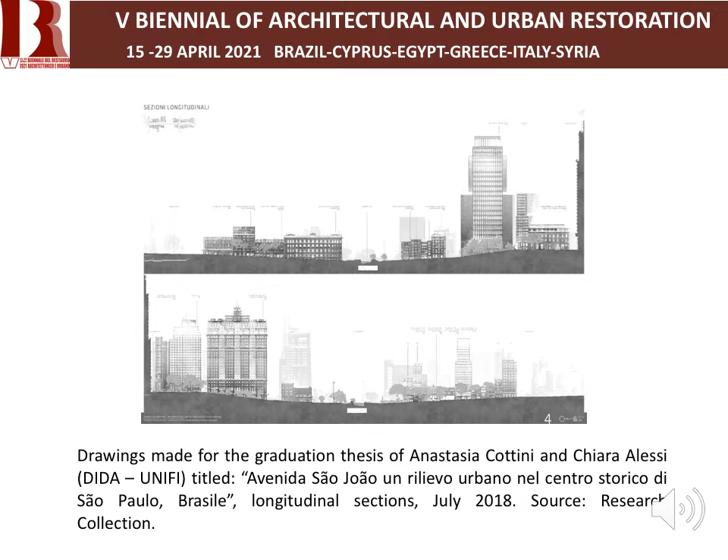For the representation of the facades, photogrammetry was performed using the PhotoScan software. For the inaccessible parts of the facades, a DJI Spark drone was used. Finally, the model obtained from the point cloud produced by 3D laser scanning was overlapped on all these data.

Once the survey process was completed, the students, divided into groups, researched the historical documentation related to the selected buildings in the archive. The results of the empirical examination and the historical research were brought together in a text divided into the following topics: urban topographic context and plans,

authorship, history and analysis of projects, owners, builders, tectonic issues, materials and construction technique of the various parts of the building, and aesthetic issues.

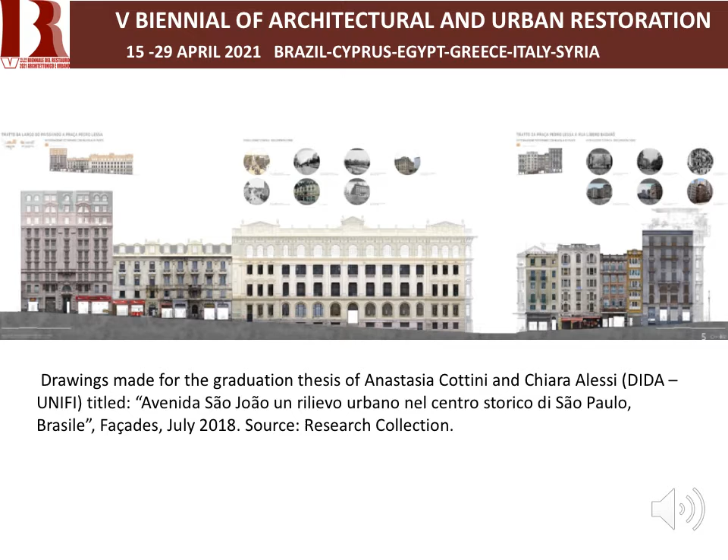In addition to the buildings in the downtown, digital surveys of historical buildings from the colonial period on the coast of the state of São Paulo were executed. That is, the ruins of the settlement known as the Sítio do Abarebebê in the municipality of Peruíbe, and the architectural ensemble of the church and convent of Nossa Senhora da Conceição and Igreja Matriz de Sant'Anna in Itanhaém, studied by Dr. Regina Vieira Santos and object of the research project Jovem Pesquisador Barroco Cifrado, funded by FAPESP, coordinated by Professor Renata Martins at FAU-USP.

The results obtained with the application of this architectural survey and historical methodologies, emphasizing the educational potential of using technology in communicating the significance of buildings as documents of urban history to the public, led in 2020 to the ratification of a cooperation agreement between the Faculdade de Arquitetura e Urbanismo and the Museu da Cidade de São Paulo, an organ of the Secretaria da Cultura da Municipalidade de São Paulo.

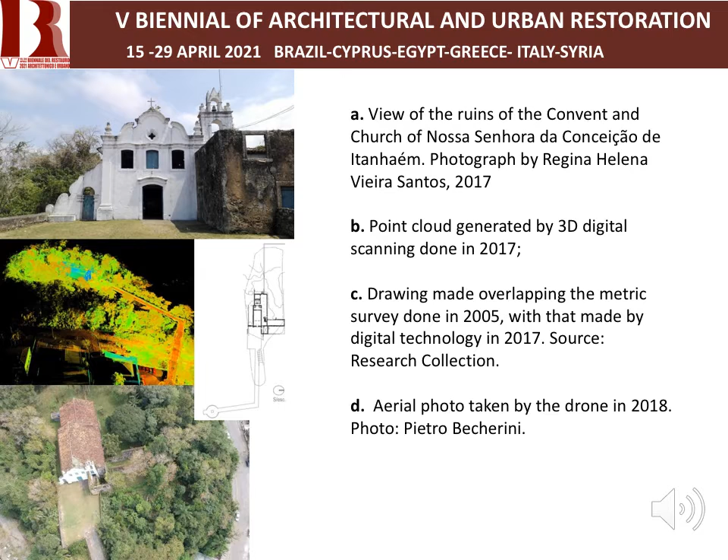As we will see, the buildings chosen as case studies were selected above all for their importance in the history of the urban development of the city, of the techniques, and of the construction industry. Below, some selected case studies will be presented.

The Edifício Baraúna, signed by the engineer Ricardo Severo, was built in 1923. It stands out for the novelty of the constructive solutions in relation to the average buildings carried out in São Paulo at the time, and the adoption of a neo-colonial decorative repertoire in the facades.

The structure is in reinforced concrete and brick masonry, and is covered with mortar, imitating carved stone decoration. The ground floor is all for commercial use, as well as the basement facing the Vale do Anhangabaú. It has an independent access through Avenida São João. Intended to be a warehouse, it has been the place of the historic Restaurante Guanabara during many years.

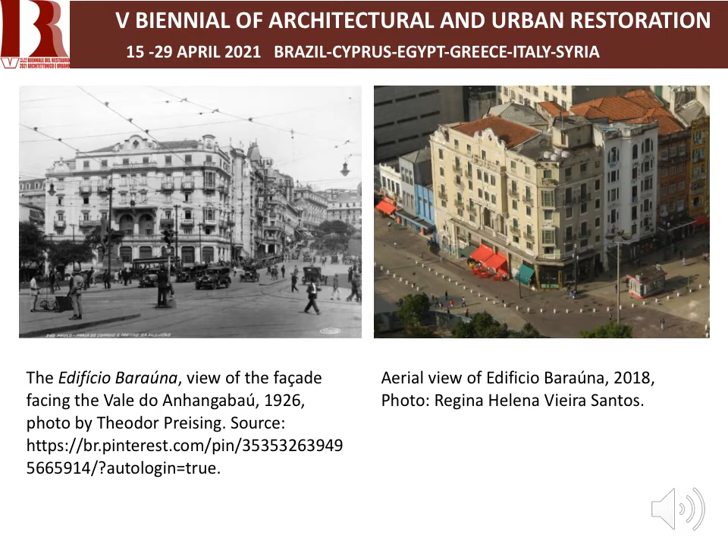The research made possible the reconstruction of aspects of the history of construction techniques and industry in São Paulo, which can rarely be perceived in the current urban context. As can be seen from the previous description, historic buildings have undergone varying degrees of transformation. Often, they still have some original characteristics, as well as decoration and artifacts of interest. However, they are, in many cases, poorly preserved or restored with materials not suited to appropriate conservation criteria.

The study of the Edifício Baraúna contributes to the urban history of São Paulo and intends to offer an example of documentation for future restoration and reuse interventions compatible with the needs of the 21st century.

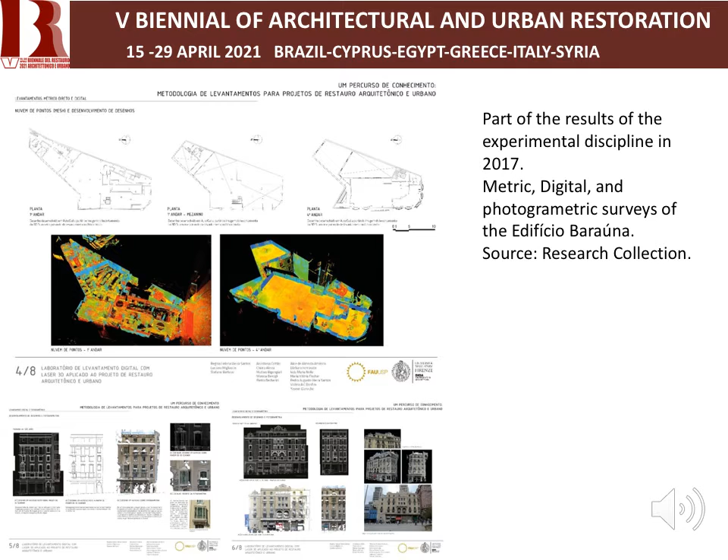In the center of São Paulo, Rua São Bento connects Largo de São Bento to Largo de São Francisco and is part of the so-called historic triangle of the city streets, along with Rua Direita and Rua 15 de Novembro.

From the second half of the 19th century, this street began to receive the main hotels intended to receive travelers arriving by rail.

According to the documents found in the Historical Archive of São Paulo, the building of the Grande Hotel branch was initially designed for commercial use, with stores on the street level and offices on the upper two floors.

It was built by the Portuguese businessman Manuel Garcia da Silva, owner of the Loja do Japão warehouse and responsible for the development of the residential area of São Paulo known as Jardim Europa.

Later, the property was rented by Friedrich Glette, owner of the Grand Hotel, to house the branch of this establishment.

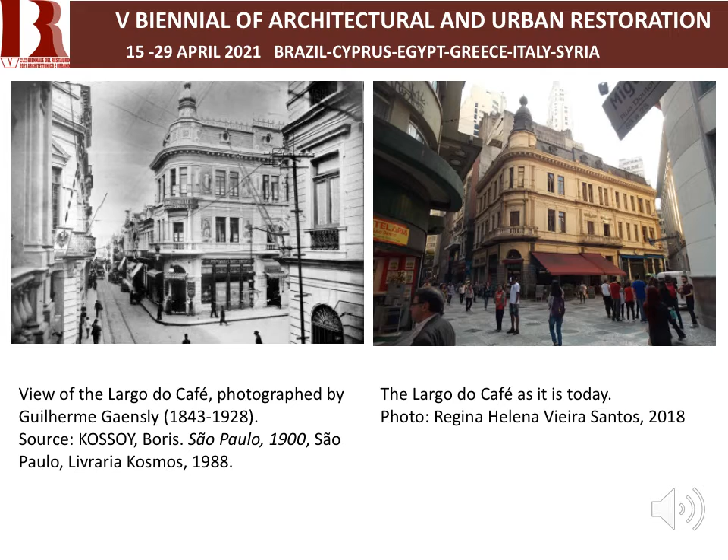The original plans of the building and facade, dating from 1907 and signed by architect Oscar Kleinschmidt, show no distancing from the road.

The construction combines several techniques, employing masonry support walls, as was usual at the time, along with profiles and metal beams supporting the floors. The openings still have their wooden frames with metal ornaments and stained glass on the upper floors, preserving the original design.

Based on the marks engraved on the iron structures, it is possible to verify that they were produced in São Paulo at the Fundição do Brás, belonging to Colonel Francisco Amaro.

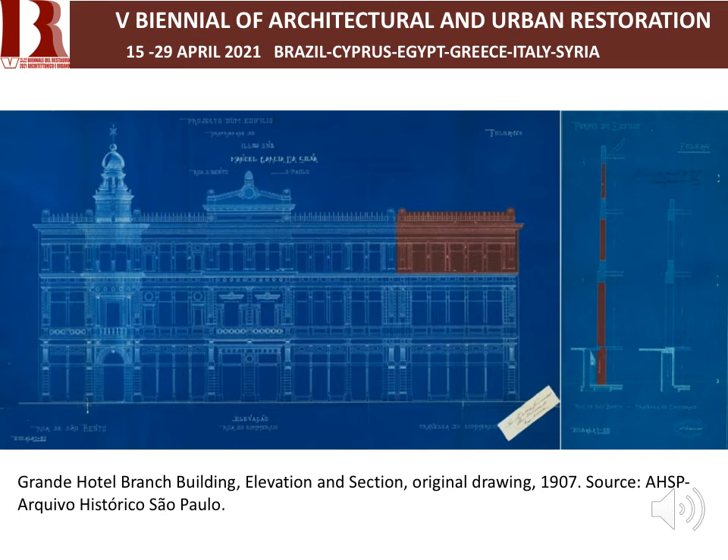The current access has steel tiled floors and still preserves the original wooden staircase and elevator.

The original roof was probably made of slate tiles, but currently it has asbestos, as can be observed in the photographic records made with the drone.

The facade ornaments, made with the same mortar as the cladding, are based on a classicist repertoire. It is worth emphasizing the typical freedom of eclecticism in the manipulation of vocabulary and classical syntax.

However, the extensive use of classical elements has an evident symbolic and ideological value. The ornamental language is appropriate to the definition of commercial palace attributed at the time for this type of mixed-use construction, commercial on the ground floor and for offices on the upper floors.

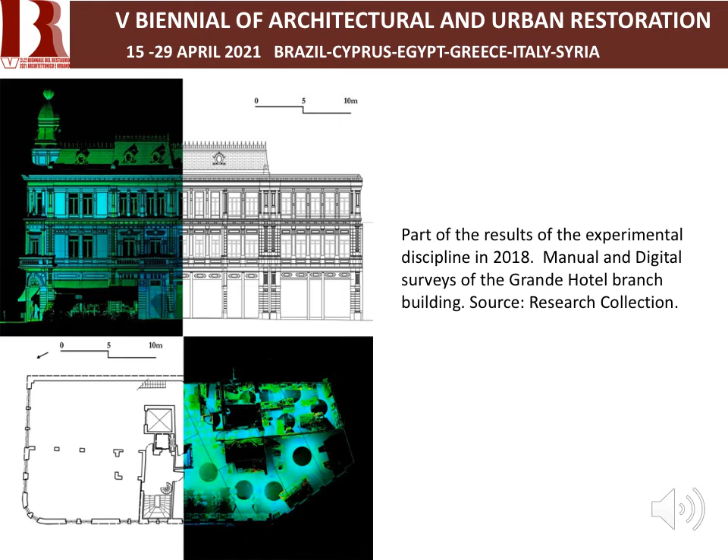In 2019, the didactic laboratory had the important support of the Museu da Cidade de São Paulo and the Istituto Italiano di Cultura. The Florence team and the Brazilian students carried out a digital survey with a 3D laser scanner.

at the Solar da Marquesa de Santos, a townhouse which underwent several construction phases from the colonial era to the first half of the 20th century. It is today the headquarters of the Museu da Cidade de São Paulo.

The building originated from the fusion of two residences located in the old Rua di Santa Teresa, which was later called Rua do Carmo and today Rua Roberto Simonsen.

Between the 18th and 19th century, the area was occupied by residences of the city elite due to its privileged position that gave access to the merchants who disembarked from the river to the Patio do Collegio area, where existed some of the main public buildings.

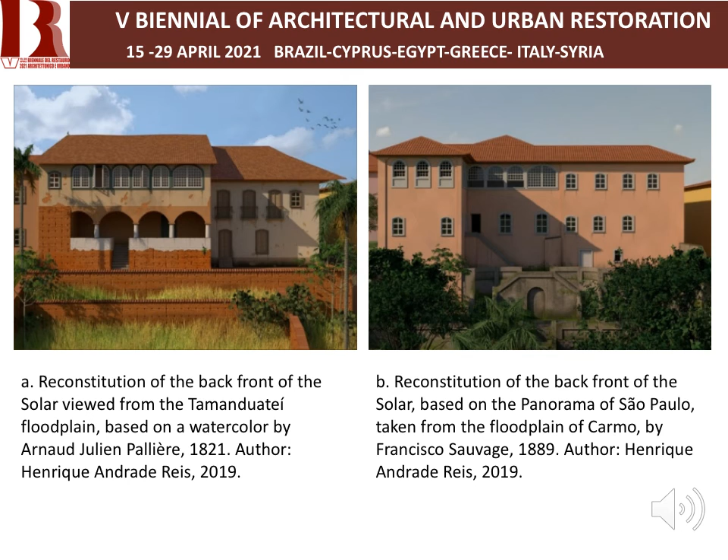The spread and exponential evolution of information and communication technologies in the heritage sector has led to the increasingly extensive development of digital applications and tools for visualization and enjoyment of cultural assets.

The course, therefore, led to a better organization of data and knowledge so that, using technology as a real extension of human intelligence, it is possible to contribute to a more effective knowledge of the heritage to be protected in Italy as in Brazil. The results of the survey, carried out with the different methodologies and techniques, combined with historical analysis...

and appropriate forms of communication, will allow the public to perceive the value of buildings and objects as a document of technological and production processes, of conflicts in social history, urban politics, mentality, tastes, and their reciprocal relationships.